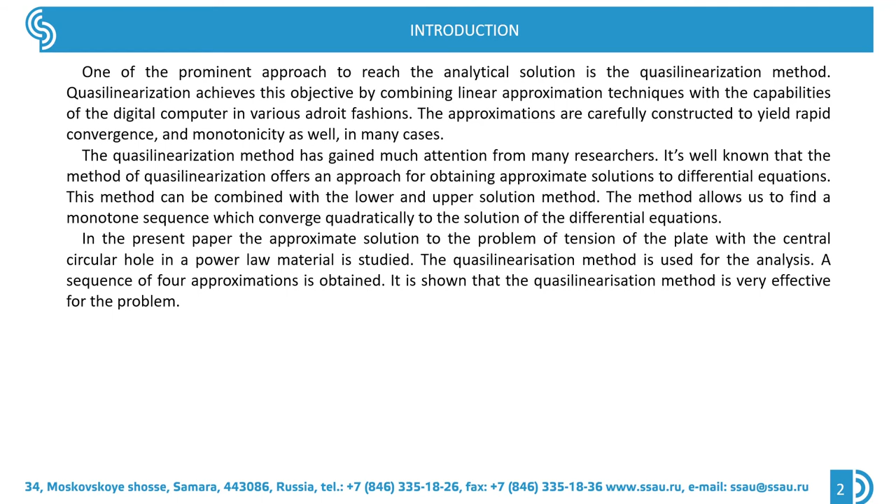The quasilinearization technique linearizes the nonlinear boundary value problem and provides a sequence of functions which generally converges quadratically to the solution of the original equation, if there is convergence at all, and often has monotone convergence. The solution of the original nonlinear boundary value problem can be obtained through a sequence of successive iterations of the dependent variable.

Let's start from an example. It's a problem of steady state creep of a rotating disk. We have a disk rotating with angular velocity omega, and it has external and internal radiuses.

Mathematical statement of the problem: strain-displacement equations can be written as equation 1, compatibility condition written as equation 2, and the equilibrium equation can be written as equation 3. Equation 4 is the boundary conditions.

For material subjected to the power law creep, the constitutive equations can be written as equations 5 and 6, where function f is a power law given by equation 8.

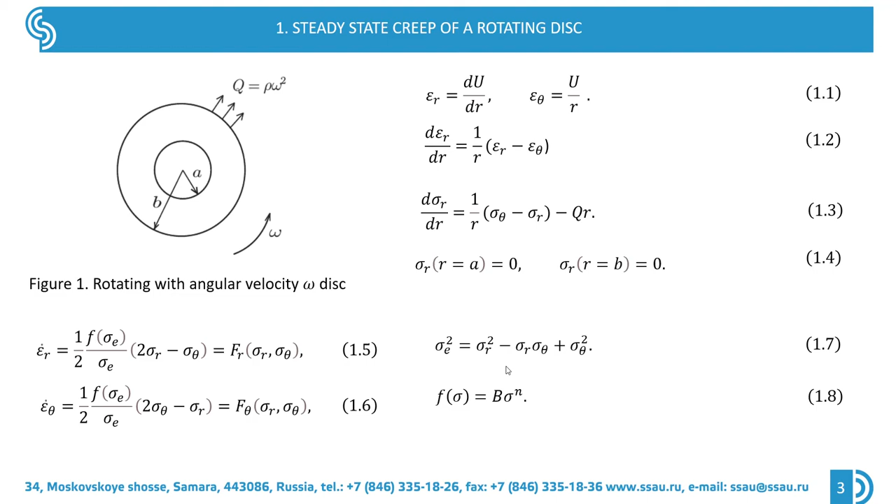Linearization of constitutive equations 5 and 6 leads, on rearrangement, to equations 9 and 10, where coefficients a and b are coefficients of the linearized constitutive equations and are evaluated on the current estimate.

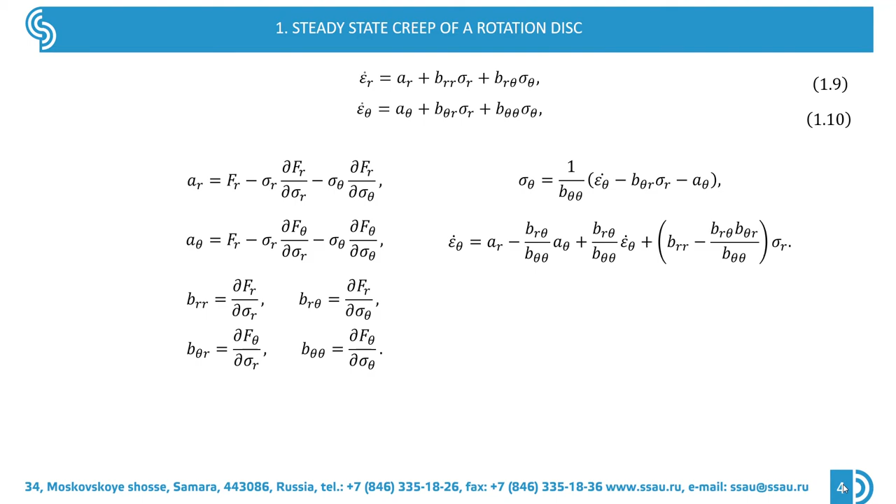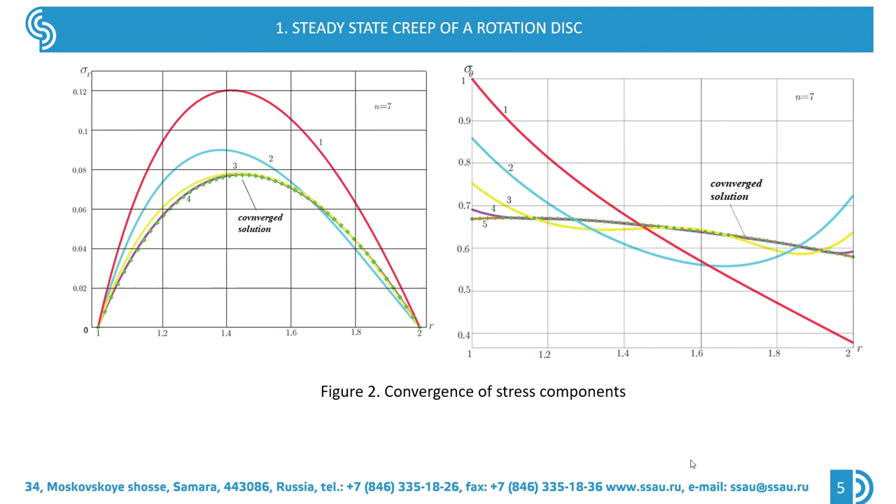Combination of this system gives a system of linear differential equations, and the results of the solution of this problem given by the quasilinearization method are illustrated by figure 2. We see the convergence of stress components, and figure 3 illustrates convergence of strain components for n equals 7,

where N is a constant of the power law creep.

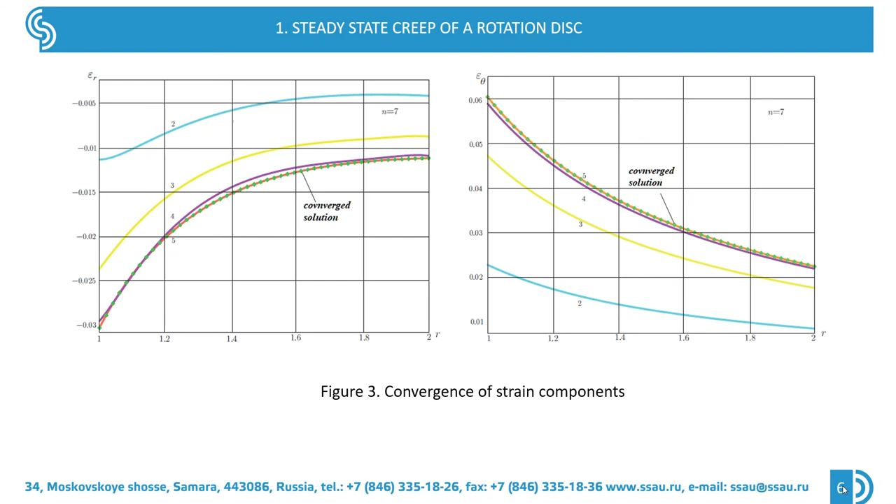Next problem is a steady state creep of a holed plate under uniform tension. Geometry is also described by the polar coordinate system, and material behavior is described by the Bailey-Norton law.

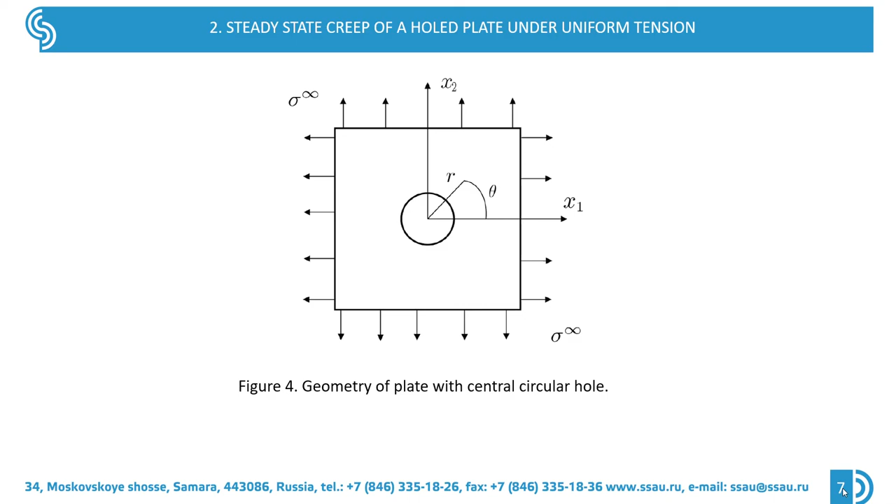Figure 6 illustrates comparing approximate analytical and numerical solutions for constant n equals 7.

Its solutions: numerical solutions given by the Runge-Kutta-Fehlberg method, and numerical solution given by results from the Simulia Abaqus software package. The red line is the result given by the quasilinearization method, 4th iteration.

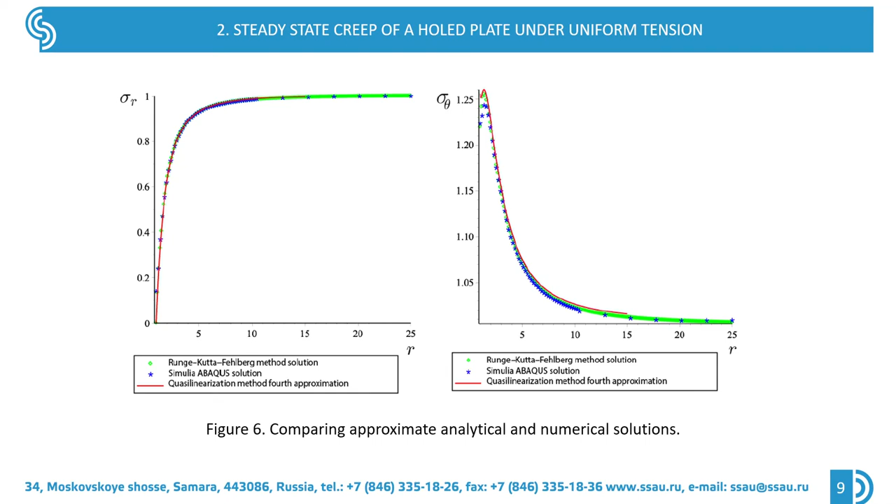And it is worth noting that tangential stress reaches its maximum value not at the circular hole but at the internal point of the plate.

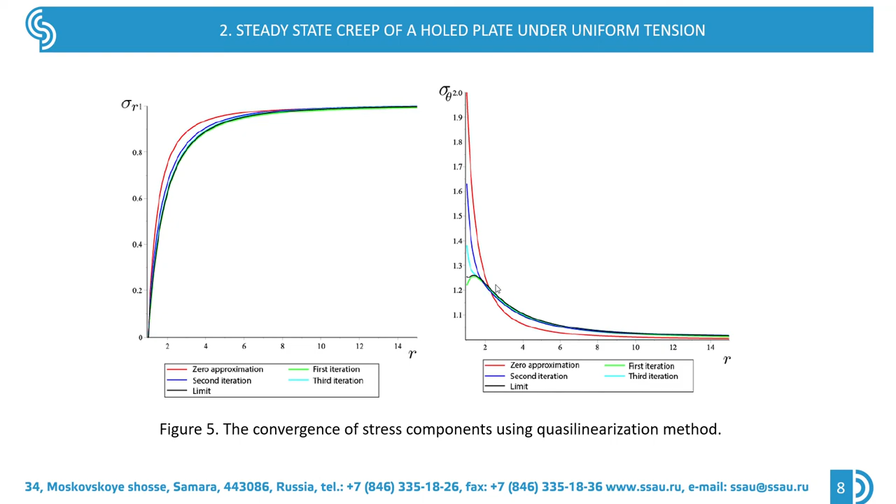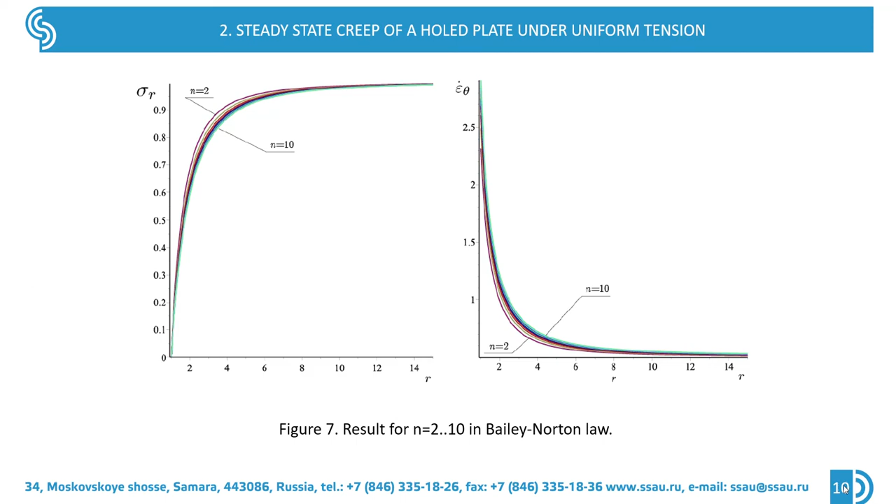And the last problem is a steady state creep of a holed plate under uniaxial tension. Also, geometry is described by the polar coordinate system, and material behavior is described by the Bailey-Norton law.

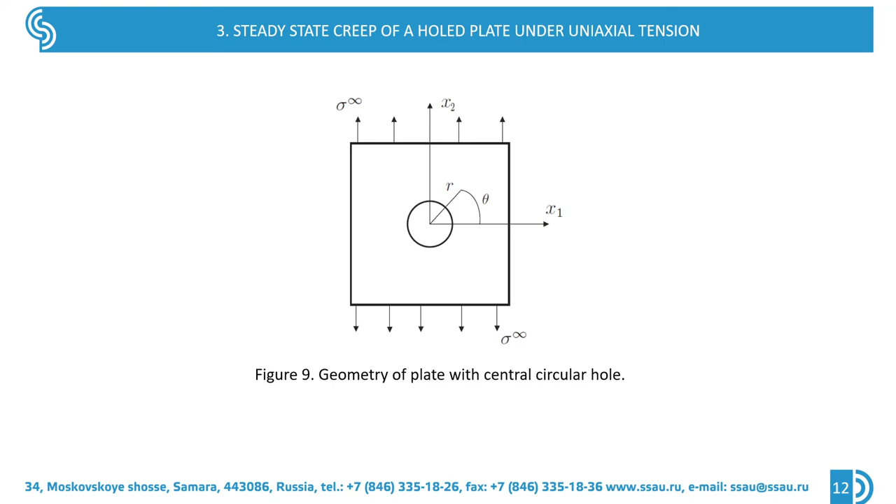Let's see the equations of the problem. It's 3 strain-displacement equations, 1 compatibility condition given by equation 4, and 2 equilibrium equations given by equations 5 and 6.

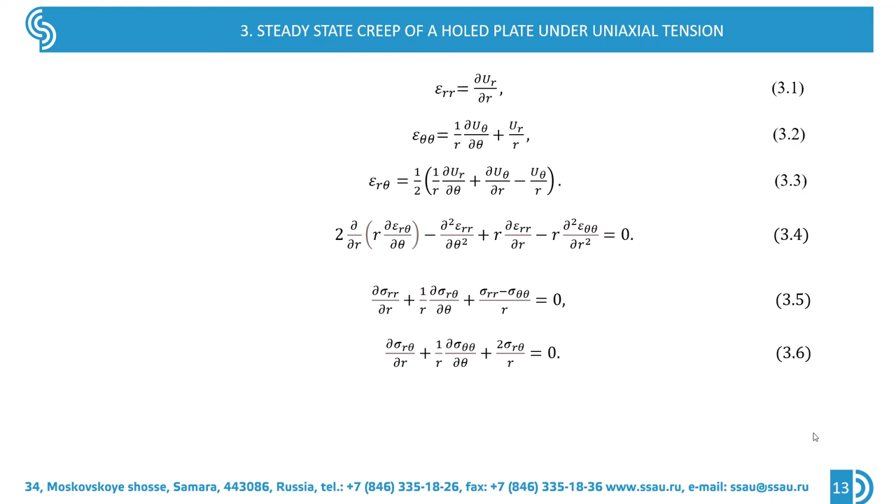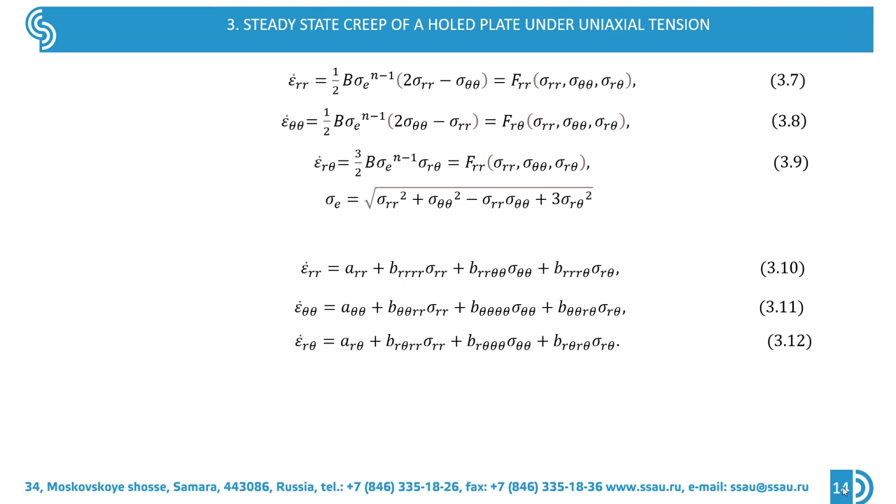Linearization of constitutive equations 7 to 9 leads to equations 10 to 12. And we have a system of linear partial differential equations.

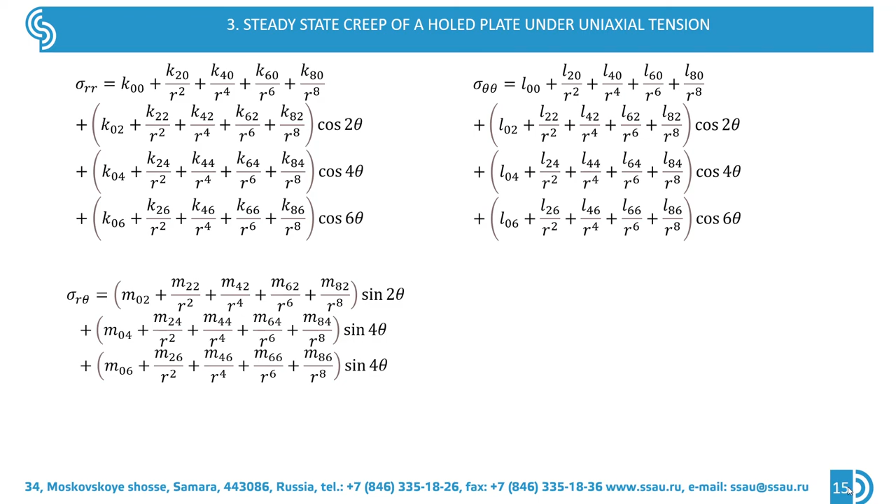In every iteration of the quasilinearization method, we calculate stress components in the next form. And there are results illustrated by figure 10.

It's a convergence of stress components for n equals 3 in the Bailey-Norton law.

And we also note that for this problem, tangential stress also reaches its maximum value at the internal point of the plate, but not at the circular hole.

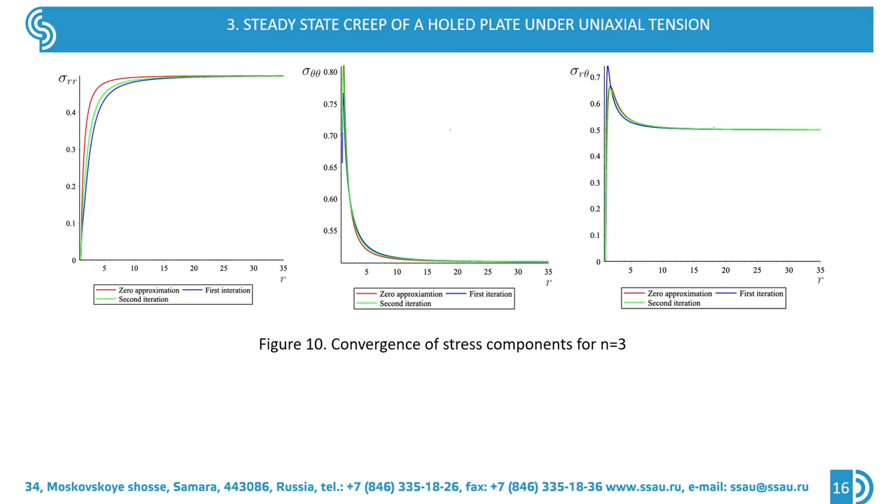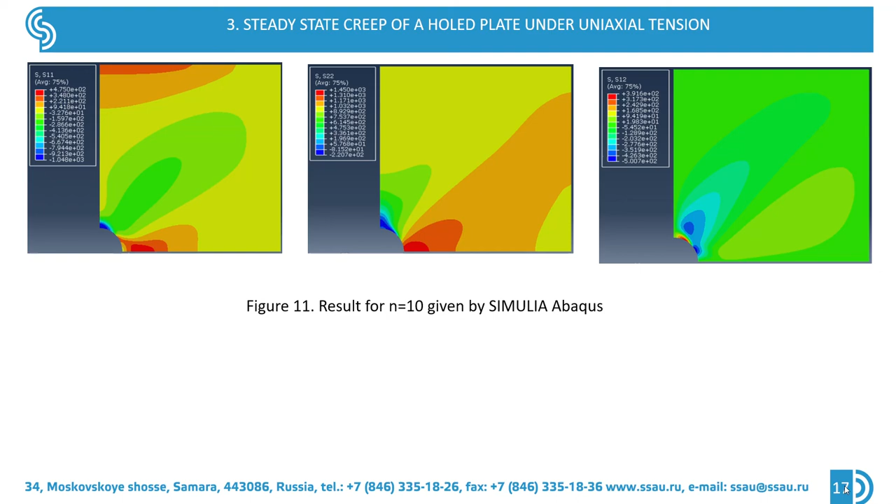And finally, conclusion. The approximate solution of the problem for an infinite plate with a central circular hole under creep regime is obtained by the quasilinearization method. Four approximations of the solution of the nonlinear problem are found.

It's shown that with increasing number of approximations, the solution converges to the limit numerical solution. It is worth noting that the tangential stress reaches its maximum value not at the circular hole but at the internal point of the plate.

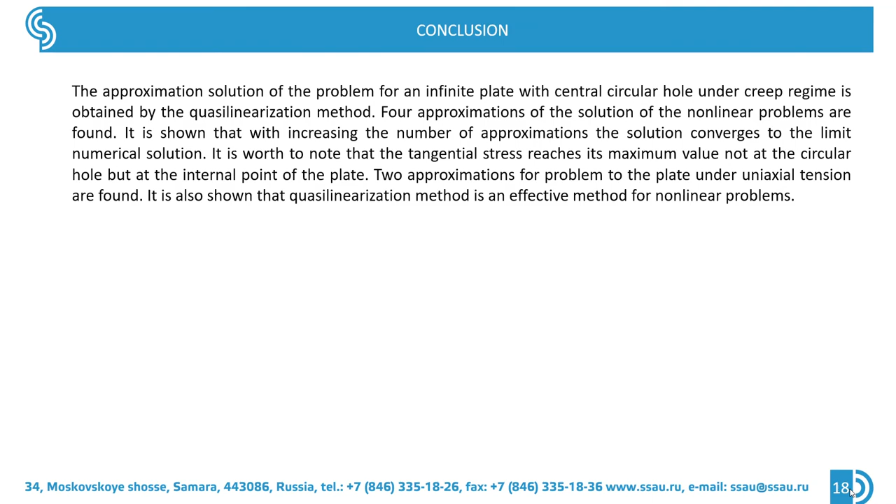Two approximations for the problem of the plate under uniaxial tension are found. It is also shown that the quasilinearization method is an effective method for nonlinear problems. Thank you very much for your attention.